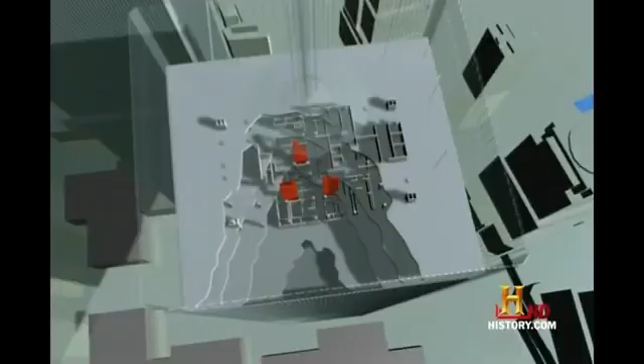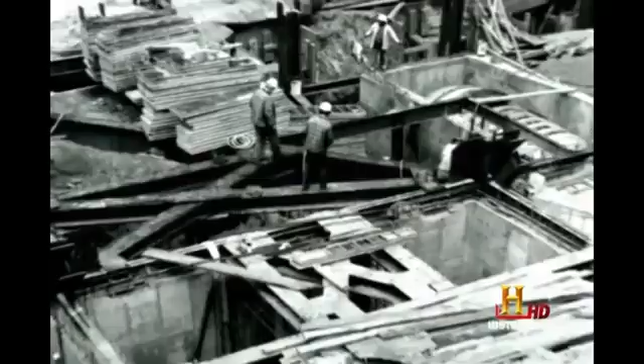The only positive aspect of this building's demise is that it fell 7 hours after the 2 main towers. Everyone had been evacuated, and even though the 47-story building collapsed in on itself in under 10 seconds, no one was killed. World Trade Center 7 was completed in 1987. It had approximately 1.8 million square feet, 47 stories, and was roughly 600 feet tall. Each of the floors was approximately 40,000 square feet, roughly the size of a football field, equal to the size of the floor plate on each of the towers.

The building was a good building. It was soundly designed. It would still be standing if not for 9/11. And it was state-of-the-art at the time, absolutely.

I lost my husband. My son. My uncle. My nephew. September 11th, 2001.

Most people don't know a third tower fell that day. The government says fire brought it down. The collapse of World Trade Center 7 was primarily due to fires. I, along with 1,400 other architects and engineers, have found the government's conclusion to be physically impossible. Impossible. We need the truth about what happened that day. Go to rememberbuilding7.org. Why it fell, why it matters, and what you can do.

Do you believe that the government had anything to do with the attack of 9/11? Do you believe in a conspiracy in terms of the attack of 9/11? No, but I do believe that it is the first time in history that fire has ever melted steel. I do believe that it defies physics for World Trade Center Tower 7, Building 7, which collapsed in on itself. It is impossible for a building to fall the way it fell without explosives being involved.

World Trade Center 7. Towers 1 and 2 got hit by planes. 7, miraculously, the first time in history, steel was melted by fire. It is physically impossible. And who do you think is responsible for that? I have no idea. But to say that we don't know that it imploded, that it was an implosion and a demolition, is beyond ignorant.

Look at the films, get a physics expert here from Yale, from Harvard, pick the school. It defies reason. Let's get one, because that I would do. It is the unthinkable. But imagine if somebody could convince you of that, could prove it to you, Elizabeth.

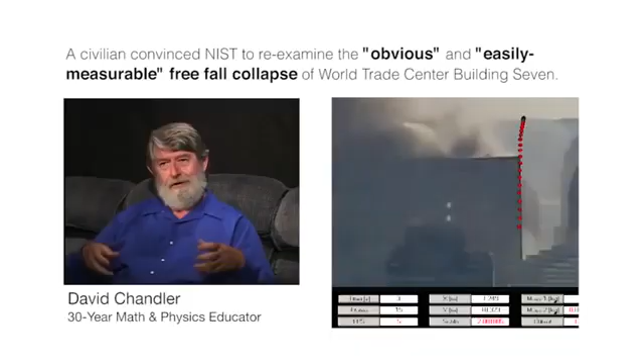Later, the government finally admitted that Building 7 collapsed at the rate of free fall, after trying to deny it. So what's wrong with a building in free fall? What is free fall? It's just like taking your car keys out and dropping them. That's how fast the building came down, for over 100 feet. This is high school physics.

A building cannot do free fall with 40,000 tons of structural steel in its structural system without it being blown up. The only way a building can accelerate as it collapses is by having pre-engineered, precisely timed, and precisely placed explosives. In other words, controlled demolition.

Saw the big hubbub going on around Building 7. Walked around it, I saw a hole. I didn't see a hole bad enough to knock a building down, though. So, yeah, there was definitely fire in the building, but I didn't hear any creaking, or any indication that it was going to come down.

And all of a sudden, the radios exploded, and everybody started screaming, 'Get away, get away, get away from it!' And I was like a deer in the headlights. And I look up, and...

I think I remember pretty clearly the two guys that I knew were on the transit radio. I don't know if those tapes are out there, but I can try and look for them and show you exactly what I'm talking about. But it was that moment, get away.

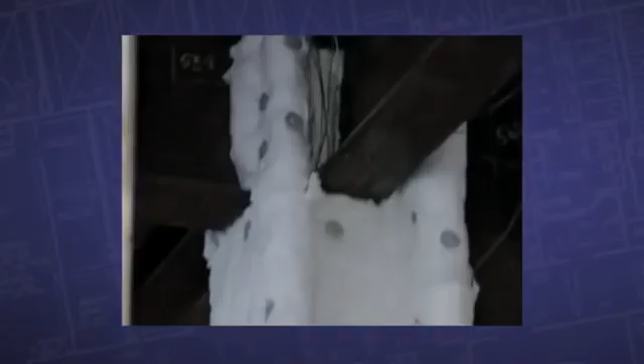In this test done by British Steel in 1995, a large amount of typical office furniture was burned to see what would happen to the heavy steel beams that supported the ceiling. It's not that steel melts in a fire - normal fires are not hot enough to melt steel. Even if you were to use an unusual fuel like kerosene, you cannot achieve temperatures hot enough to melt steel. But what happens is it starts to lose its strength, and as it loses strength, it starts to sag.

This was the largest test of its kind ever conducted. It showed how unprotected steel can be distorted even by a normal office fire. But as is typical in steel buildings, the structural beams only slowly and progressively warped and sagged - there was no chance of a sudden collapse.

In my previous career as a firefighter, normally you'd never be afraid to go into a Type 1 building because they're not combustible - you would just charge at it and put the fire out. Never in my training were we ever taught that these type of buildings could just collapse in on themselves. There's definitely much more going on than just fire.

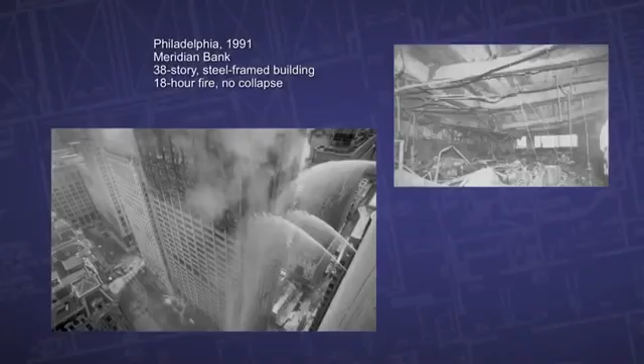The World Trade Center 7 building reminds me of the Meridian Bank building in some ways in Philadelphia. The Meridian Bank building is a 38-story skyscraper that burned for 18 hours in 1991, suffered extensive damage from the fire, but did not collapse.

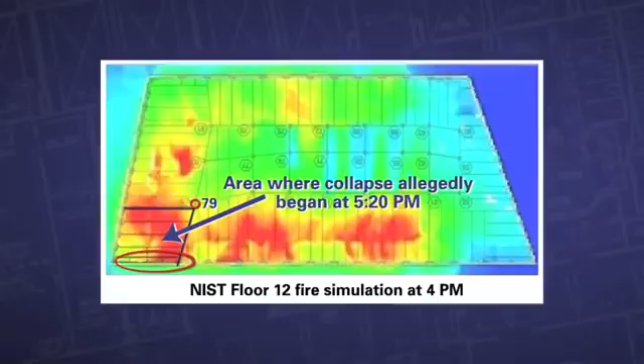NIST tells us this collapse mechanism, starting with thermal expansion, worked its way upward and outward through the building in a matter of seconds - there's not enough time for the building to collapse the way NIST tells us it collapsed. NIST claims the fires were very large, very hot, and long-lasting, when in reality, observation researched by many people shows these fires did not last very long. They were not in the locations where NIST claims they were at given times.

I'm a fellow of the American Institute of Architects. For the 40-plus years that I've been practicing architecture, I've designed a variety of buildings from small houses to high-rise office buildings. Some of the high-rises I've worked on are 1 Shell and 2 Shell here in Houston. I was project manager for a 22-story office building in Akron, Ohio.

Later in the day, when World Trade Center 7 collapsed, they had already shown us pictures of a few fires in that building, and they weren't even raging. How could that cause a building to collapse as if it were imploded? Couldn't happen.

New York City, 2001. No tall building had ever collapsed primarily due to fire. But that's exactly what investigators believe happened to the 47-story World Trade Center Building 7 on September 11th. According to a 3-year comprehensive building and fire safety investigation just completed by the National Institute of Standards and Technology, or NIST, World Trade Center 7 collapsed because of fires. We really have a new kind of progressive collapse that we have discovered here, which is a fire-induced progressive collapse.

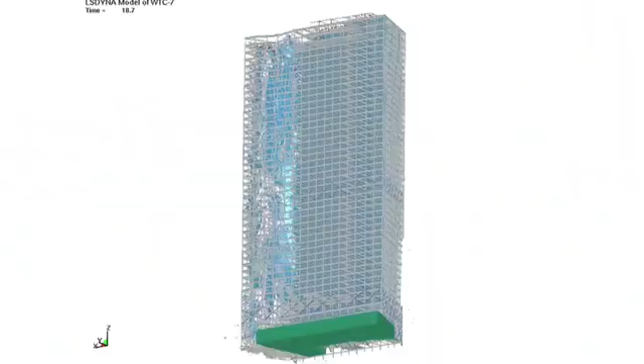And in fact, we have shown for the first time that fire can induce a progressive collapse. NIST used detailed data describing the building and its contents to create the most complex computer simulation of a structure collapse ever made. Falling debris from Tower 1 started fires on 10 floors in Building 7.

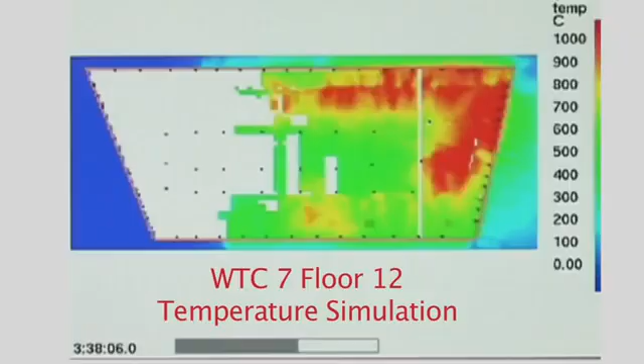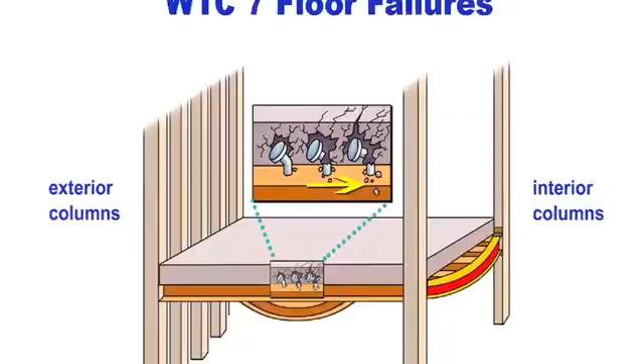A break in the city water main from the collapse of the towers disabled sprinklers in the lower half of WTC 7, allowing fires on those floors to burn for 7 hours. The NIST computer model was validated with evidence from videos, photos, witness accounts, and other data.

It shows that heat from fires expanded long support beams, causing connections and floors to fail. So you look at the floors failing here, and eventually column 79 is going to buckle, it fails, and then the entire vertical progression takes place.

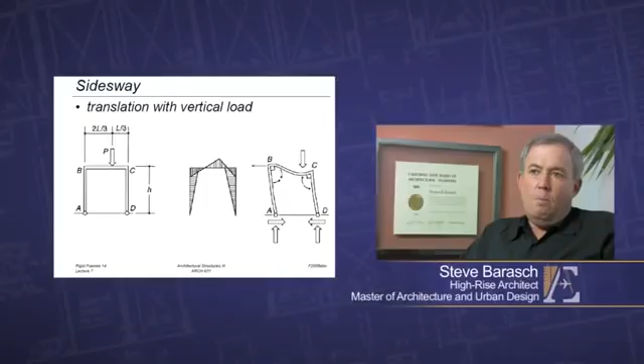If the buildings had come down by fire, we would have seen a more natural progression of collapse, and clearly a more asymmetrical pattern should have been present. The symmetry is the smoking gun. It cannot happen that when you have asymmetric damage, you will get a perfectly symmetrical collapse.

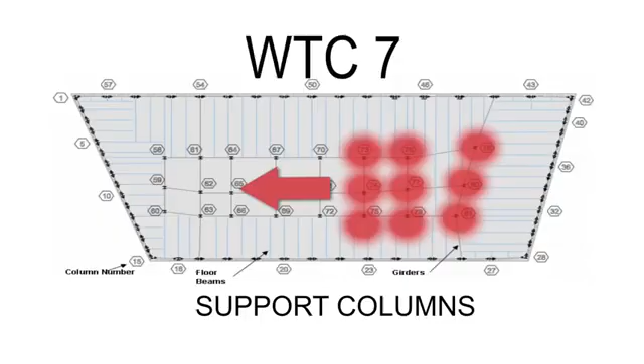The exterior columns on the outside as well as on the inside, at the bottom, would have to be severed almost at the same time. The buckled column caused additional collapsed floors and falling debris that removed support from adjacent interior columns. A chain reaction then caused other interior columns to fail in quick succession. The outside shell of the building fell.

I worked for Controlled Demolition Incorporated, CDI, the top-rated explosives demolition firm in the world. As an explosives loader, my job was to place explosives in the buildings to prepare them for demolition. I was licensed while in New York by the New York Fire Department to handle explosives. And I worked on major projects such as Seattle Kingdome, the Three Rivers Stadium, Philadelphia Naval Hospital, and Keyspan gas holders in New York. What I saw, it was a classic implosion.

The center of the core, the penthouse area, starts to move first, and then the building follows along with it. That's another indicator that this NIST report is very suspect. When it's all finished, the outside walls are piled one on top of the other right in the middle of the building, just like a house of cards if it were coming down.

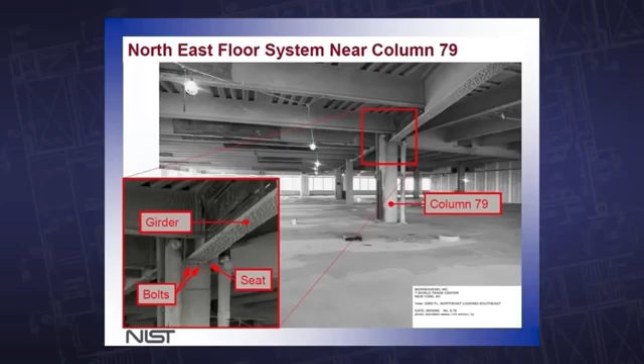As a structural engineer, I don't believe that the failure of one column would normally bring down an entire building in the way we saw World Trade Center 7 come down. According to NIST, the failure occurred at column 79 on level 12. This means basically they're talking about a single columnar collapse or failure that resulted in a total collapse of the building. That just does not make any sense.

The NIST team found no evidence that explosives were involved in the collapse. Our analysis showed that even the smallest explosive charge capable of bringing down the critical column in the building, had it occurred, we would have seen sound levels of 130 to 140 decibels about a half a mile away. That would have been an incredibly loud sound, and that sound was not picked up by any of the videos or witnesses that we have talked to.

In its final report on the destruction of World Trade Center Building 7, NIST, the National Institute of Standards and Technology, went out of its way to avoid investigating the use of explosives. Their sole rationale for not investigating explosive use was the supposed lack of sufficiently loud sounds.

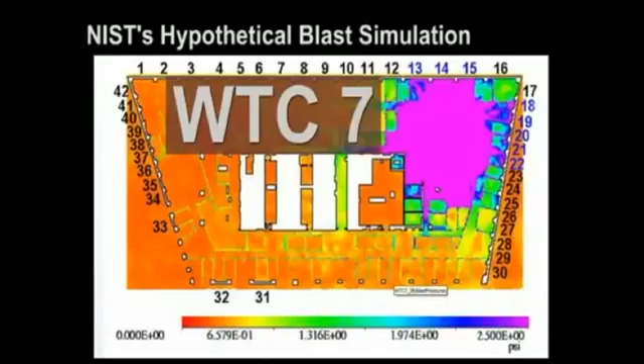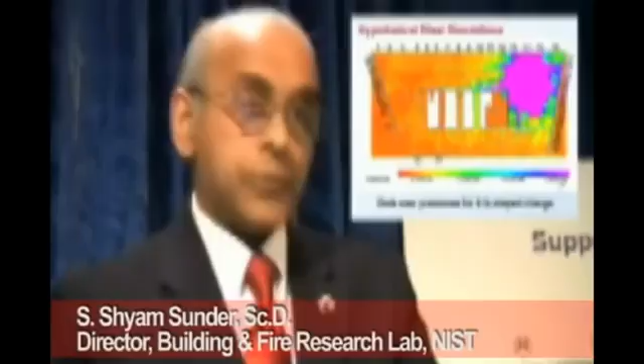NIST computed what they claimed would be the minimum loudness of an explosion that could sever column 79 with a single blast. Then they claimed no observers detected explosions as loud as their predictions. This size blast would have produced an incredibly loud sound that was not recorded on videos of the collapse nor reported by witnesses. On the basis of this artificial threshold of interest, they swept aside all evidence of actual explosions and concluded that no explosives contributed to the destruction of the building.

We did not find any evidence that explosives were used in the collapse of Building 7. Yet there was voluminous evidence of explosions.

Here's one of the guys who can tell you I'm okay, all right? Here, hold on. You want to call your mother or something?

You heard explosions, like boom. We just heard one more explosion. That's about the fourth one we've heard.

A few blocks up West Broadway, looking toward the World Trade Center in the distance, Ashley Banfield was conducting an interview for MSNBC. The mic was set to pick up speech a few inches away, but from the involuntary startle response, 'oh my God,' we know explosions are being heard.

However, listening closely, we discovered that the microphone did indeed pick up the sounds of explosions, but very faintly. Turn up the volume. Listen for a low rumble in the background. You were just told by police that you should move out of your apartment, Fabiana. Yes. You've got Carolina here? Yes. They advised us to leave because we have...

Oh my God. This time the sound has been filtered to emphasize low frequencies. Listen for booms like a bass drum in the distance. In fact, you were just told by police that you should move out of your apartment, Fabiana. You've got Carolina here? Yes. They advised us to leave because we have...

The minimum sound level of interest, as determined by NIST, was based on a blast of RDX, one of the loudest explosives available, large enough to break a major column outright with a single blast. They assumed no efforts at noise abatement, complete transmission of the sound to the outside air, no absorption or blockage of the sound along the path. Who knows if they assumed the use of an efficient cutter charge, or if they simply figured the effect of a bomb planted beside a column. They don't say. Their sole reason for doing this calculation was to create a pretext to sidestep any actual investigation of explosives.

Why would NIST, or anyone else, choose to exclude from its investigation any evidence of any explosions related to the destruction of the building?

At the same time, it should be noted that NIST's report on Building 7 was never published by a peer-reviewed publication. This means their analysis of the collapse cannot be validated from a scientific point of view. Even though this was an unprecedented event in history, we are being asked by NIST to take their word for the soundness of their conclusions.

It's based on sound science, and it is consistent with all the observations we have. But it has never happened before, right? But the physics is consistent, it's sound, it's been analyzed, and we have the results. And we are very comfortable with our findings.

They might have been comfortable, but the scientific community of architects and engineers was not. Science is never secret when it's done right. Science isn't science unless it's published, unless it's openly published and made available for criticism.

Architects and Engineers has asked NIST to at least verify the computer model on which they've based their theory of the collapse. But in this case too, NIST has refused to make their data public. Structural engineers rail against NIST because they refuse to show the visualization. It's a black box. You cannot download any of this data. This means that also for the accuracy of their computer model, we have to take NIST's word for it.

Here is our structural model showing the building collapsing, which matches quite well with the video of the event. This is the video of the event. On the right is one of the two animations released by NIST on the collapse of Building 7. When you observe the footage of how the building failed, and when you look at the animation of the failure, and compare that to what you actually observe in reality, I think they disprove their own theories.

It is impossible for it to fail the way they said. The second animation released by NIST is even more inconsistent with the real event. While the animation shows a pronounced inward bending of the top of the structure, the video footage shows the entire top section of the building maintaining its shape all the way through the visible part of the collapse. This can be verified by different angles.

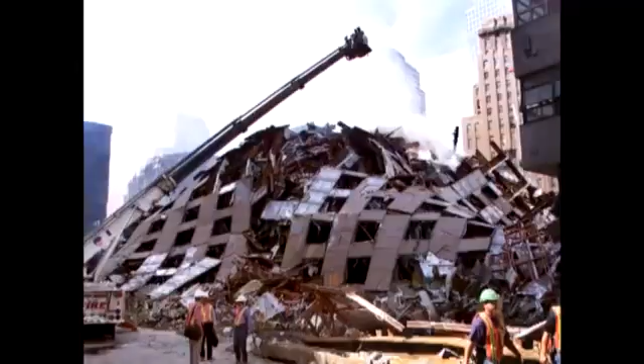If this is what NIST calls matching quite well, one can imagine what the reliability of their entire report can be. In order to justify the first and only collapse in the history of a steel skyscraper due to fire, the debunkers have maintained that Building 7 was weaker than the average steel structure because it had been built over an existing electrical substation. The building was extremely unconventional. It had this giant Con Ed substation with enormous trusses carrying extraordinarily high loads, very vulnerable to fire and other kinds of damage. But NIST itself has refuted this possibility.

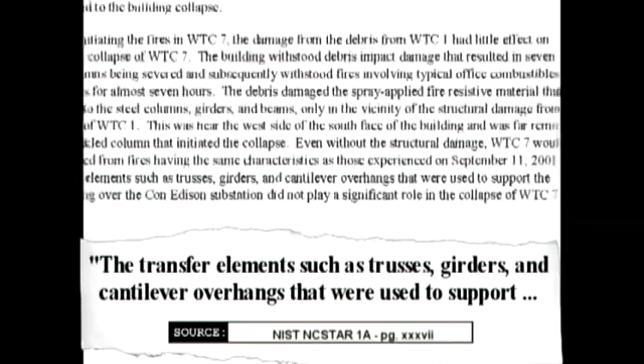From the final report we read: the transfer elements such as trusses, girders, and cantilever overhangs that were used to support the office building over the Con Edison substation did not play a significant role in the collapse of World Trade Center 7. In fact, it was the opposite.

After it was completed, Larry Silverstein had the building reinforced beyond its requirements to accommodate the needs of its main tenant, Salomon Brothers. From a 1989 New York Times article: Salomon Brothers intends to spend nearly 2 years and more than $200 million cutting out floors, adding elevators, reinforcing steel girders, upgrading power supplies, and making other improvements in its million square feet of space. We built in enough redundancy to allow entire portions of floors to be removed without affecting the building's structural integrity, said Larry Silverstein, president of the company. More than 375 tons of steel, requiring 12 miles of welding, will be installed to reinforce floors for Salomon's extra equipment.

If there was one skyscraper in the world that should have never collapsed due to fire, it was Building 7.

In other news this week, the finding that allowed the National Institute of Standards and Technology to withhold data from its World Trade Center 7 collapse simulation has finally been released via whistleblowing site cryptome.org. The finding was made on July 9, 2009, and reads in part: 'The disclosure of the information in connection with NIST's investigation of the technical causes of the collapse of the World Trade Center towers and World Trade Center Building 7 on September 11, 2001 might jeopardize public safety. Therefore, NIST shall not release the information.' Although the finding was made last year, the actual finding itself was not available to those who had requested the information, leading many to suspect it would contain details of exactly how or why the data from NIST's WTC-7 collapse simulation would jeopardize public safety, but no such explanation is to be found. Analysts note the finding is especially odd given that NIST itself has claimed the collapse of WTC-7 was an extraordinary event, unprecedented in history, and that they arrived at that conclusion using the computer model whose input and result data they have now classified in the name of public safety.

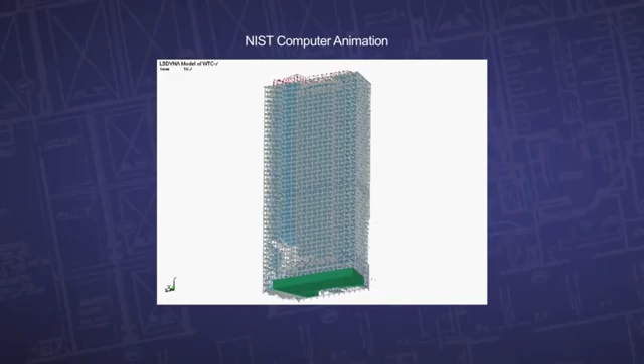Many are wondering whether NIST's reluctance to release their data is due to the questionable nature of the science underlying a simulation that many have pointed out is little more than a visual recreation of the initiation of a building collapse, which in itself explains nothing and does not even show the entire progressive collapse of the 47-story building.

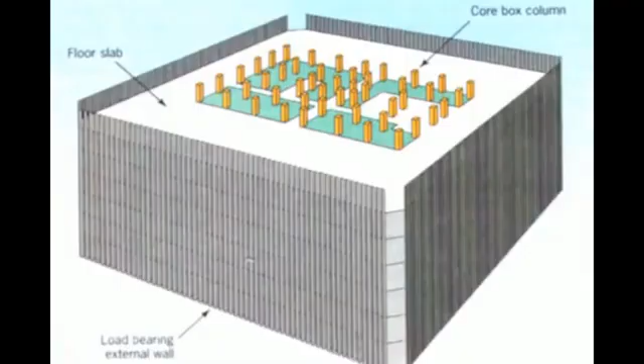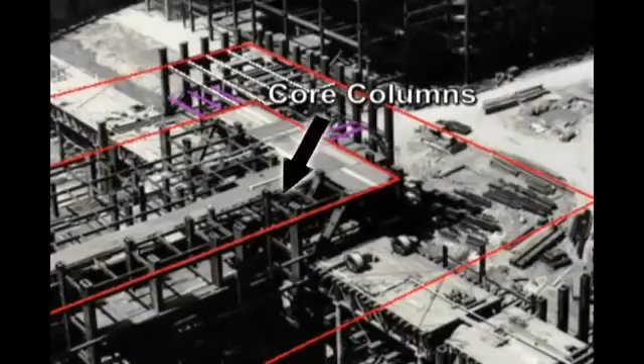The cores themselves, if you've seen diagrams of the building, there's a large central rectangle in each of the towers that contained 47 columns. These columns were the primary structural support of the building.

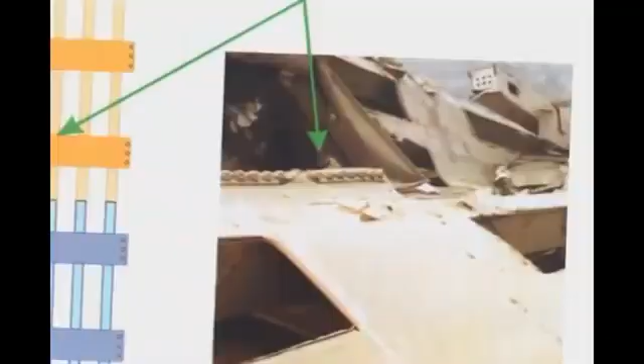They were given the role of supporting the whole gravitational load of the building. Since they were so strong, it would have been reasonable to think they would have withstood, at least to some extent, the collapse. But in fact, after the buildings collapsed, there were basically only little stubs of these things standing up a floor or two above ground level.

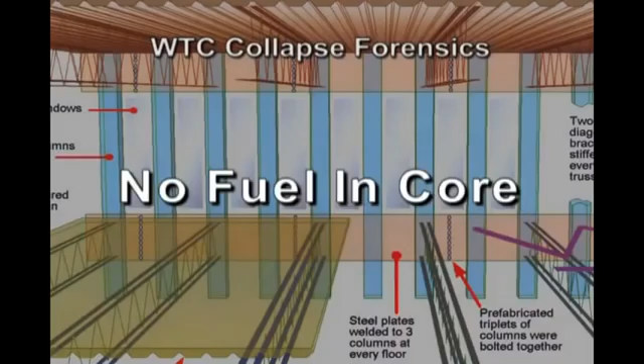The cores did not have much in them that would burn. They were dedicated to things like elevator shafts, utility shafts, stairways. So you have drywall material, a little bit of carpeting, but not really any inflammable material in the core itself. The core was specifically designed so it could not function as a chimney.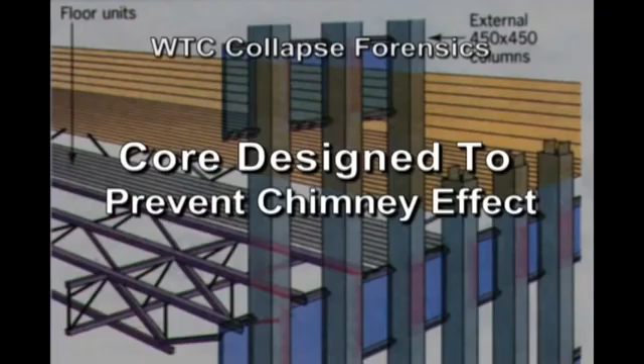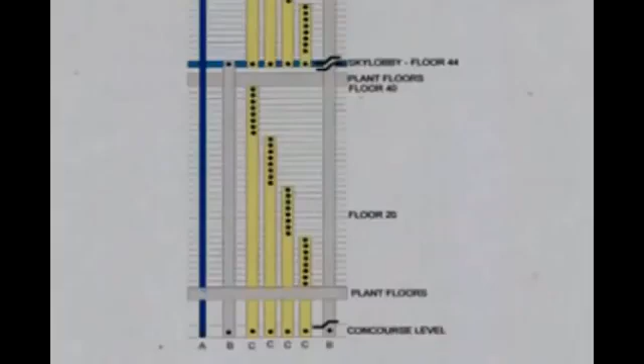They did not want, in case of a fire, for the fire to travel through the elevators, or for air to come in through the elevators. So they were designed with what this architect, Aaron Swirski I believe, referred to as a hermetically sealed system. There were fire shutters designed to close off the core in an event like this, and those, as far as we know, functioned properly, meaning there was a very limited amount of oxygen available.

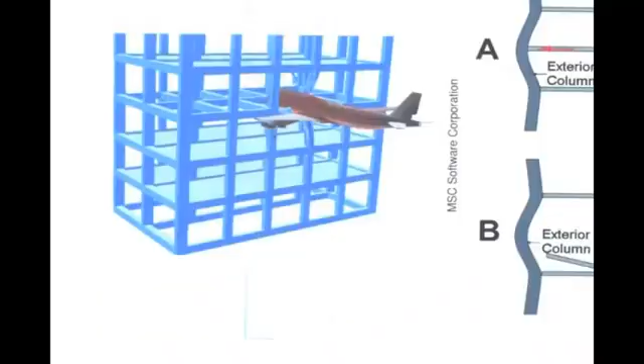As far as the issue of what failed and how, some of the initial suggestions showed up in the NOVA documentary, which is a good example of what I like to call proof by computer animation. Thomas Eagar, who was a material scientist but not a structural engineer, became a spokesman for these documentaries, and indicated that the floors had somehow failed, that the trusses supporting the floors had failed. This was the theory put forward in the initial FEMA report.

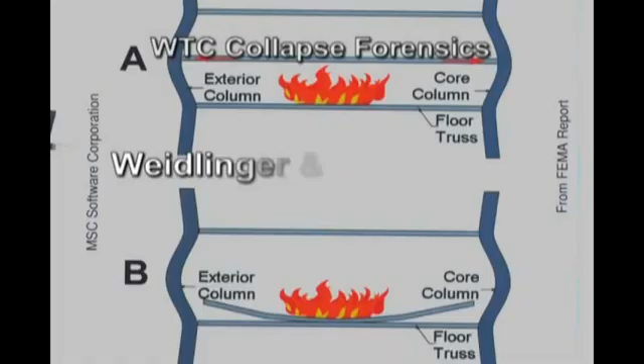Subsequently, there have been complete contradictions of that. Jim Hoffman has done quite a bit of research, available on the web, concerning the problems with this idea that the floors would have simply fallen. There was a study done by Weidlinger Associates; the chief engineer there was Mathys Levy, a very well-known authority on building collapses. He specifically disavowed the idea of pancaking or collapsing of the floors.

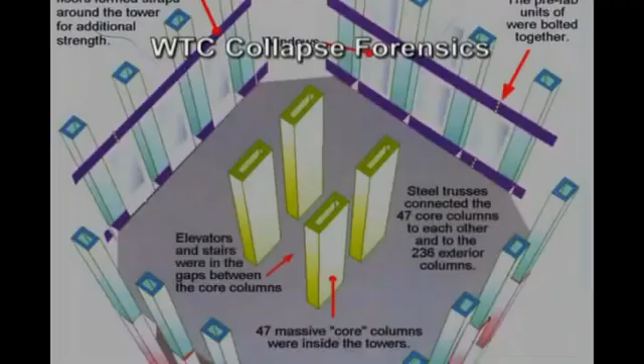The most recent official report we have on this, from the National Institute of Standards and Technology, NIST, rejected the idea that floor collapse was part of it. As a result, we have basically no sequential model at this point. What NIST has suggested is that there was some kind of simultaneous collapse of the cores, but they have not attempted to give any modeling as to whether those cores could have in fact been destroyed by the fires in the way that they claim.

The building was designed to have a fully loaded 707 crash into it. That was the largest plane at the time. I believe the building probably could sustain multiple impacts of jetliners, because this structure is like the mosquito netting on your screen door, this intense grid, and the jet plane is just a pencil puncturing that screen netting. It really does nothing to the screen netting.

I walked into the office and the first words I heard were, 'A plane's just run into the World Trade Center.' My initial thought was, well, that's okay, it's built to withstand a 707. It did not seem possible that these towers, designed to withstand the impact of a 707, could possibly collapse in such a short order of time from the time they were hit.

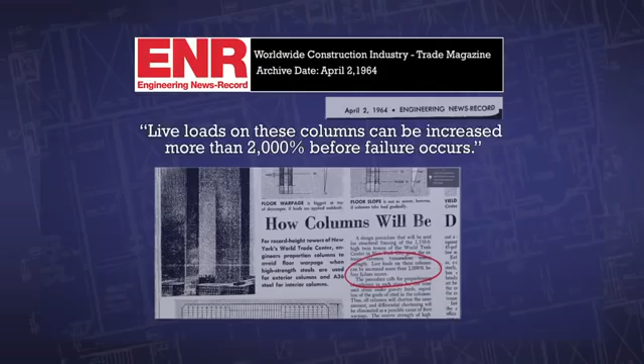They were designed to withstand hurricane force winds of up to 140 miles an hour. These buildings are built to handle several times the load above them. Those perimeter columns could handle 5 times the load above them, and the core columns could handle 3 times the load above them.

I remember walking up to a window, and a young man turned to me with tears coming down his face, and he said, 'Will they fall down?' And I said, 'No. Never has a steel structure building in the history of steel structured buildings ever fallen down for the reasons of fire.'

The majority of the jet fuel was burnt up instantly in the big fireball, and it was gone. The fires that were left were office furnishings and carpet and things like that. A lot of things in these kinds of buildings have to be fire resistant by nature—it's required by code. So there really isn't a whole lot of fuel in there to begin with.

The media portrayed these fires as being extremely hot, but the fires were not that hot in World Trade Center 1 and 2. If you look at NIST's own data, you could see this.

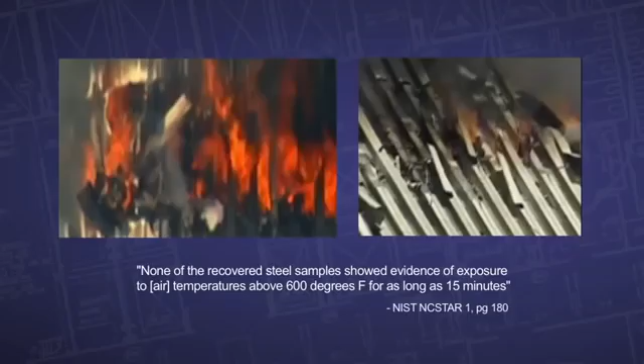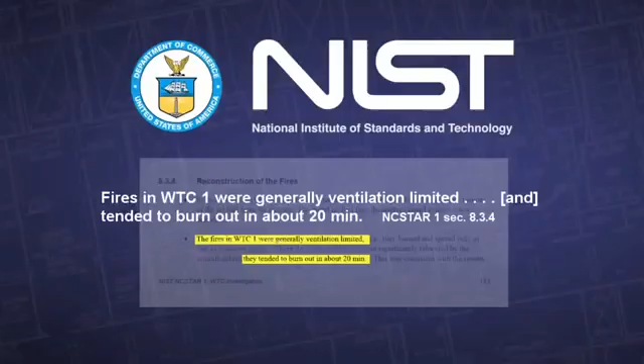Using our own powers of observation, you could tell by seeing these fires and the black smoke coming out of the windows that the fires were oxygen starved and incomplete combustion, which meant it was a low temperature fire.

I looked up in a manual the burning temperature of jet fuel and found that under the conditions that existed at the World Trade Center on 9/11, the jet fuel had to have been burning at about 750 degrees Fahrenheit. I also noticed that the official explanation was that the heat from the fire supposedly softened the steel and thereby brought the buildings down.

If you have a flame at 750 degrees, you can hold that flame under a steel beam forever and never reach a high enough temperature to bend steel, let alone melt it. So immediately I knew at that point that the official explanation was dead wrong.

First of all, let's go back to your basic premise that there was a pool of molten steel. I know of absolutely nobody, and no eyewitness who said so, nobody who's produced it.

You'd get down below and you'd see molten steel running down the channel rails, like you're in a foundry. Yeah, like lava from a volcano. Actually melted beams where it was molten steel that was being dug out. Underground, it was still so hot that molten metal dripped down the sides of a wall. It's this fused element of steel, molten steel and concrete and all of these things all fused by the heat into one single element. And they pulled off a big block of concrete, and there was like a little river of steel flowing.

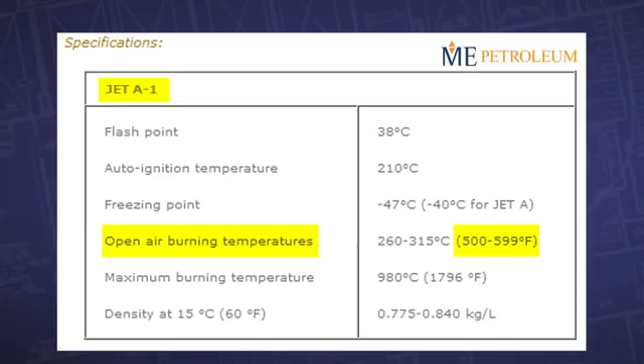There were reports of molten steel having been seen in the rubble pile of all three buildings, and I knew that jet fuel, which is essentially kerosene, is not capable of melting steel nor iron. Kerosene or jet fuel burns at less than 1800 degrees Fahrenheit, and molten steel needs at least 2700 degrees Fahrenheit in order to melt. In an office fire, you cannot generate enough heat to melt steel.

And yet we have evidence of molten iron in the microspheres, in the rubble pile, and the metal pouring out of the side of the tower.

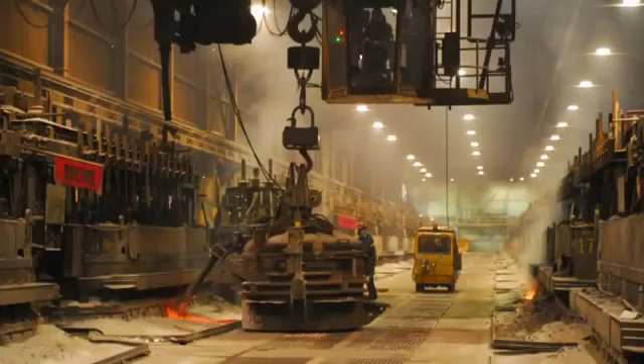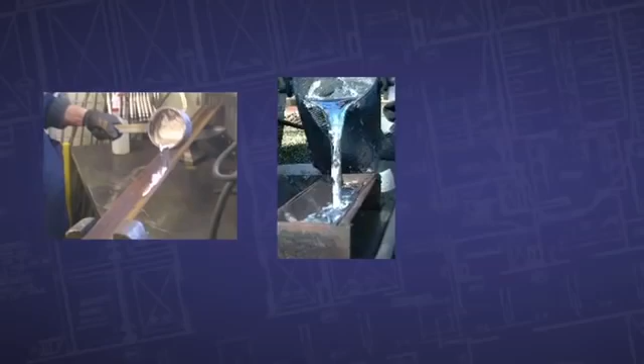I worked as in the project engineering department of the casting plant of Alcan, the aluminum company of Canada, one of the largest aluminum smelters on the planet at the time. In that smelter we turned aluminum oxide into aluminum, molten aluminum. Molten aluminum is silver, it's not yellow. It looks like mercury. The yellow molten metal that I saw pouring out of the South Tower is indicative of molten iron.

Overflights had detected with infrared camera 1400 degree Fahrenheit hotspots on the surface of ground zero, and that being there for a week indicates that there was something very hot going on below the surface.

This is how it's been since day one. Oh, it's unbelievable, and this is almost 6 weeks later. As we get closer to the center of this, it gets hotter and hotter. It's probably 1500 degrees. We've had some small windows into what we thought was the core at some point, and it looked like an oven. It was just roaring inside, and it had a bright reddish orange color.

See that stuff he's pulling out? What was that, Chief? We're gonna hold off on the water. See the stuff he's pulling out? Yeah, it's red hot. If we hit it with too much steam, you won't be able to see what he's doing.

There were fires of 2,000 degrees Fahrenheit below the ground. You see how this debris is still smoking? That's from the fires that are still burning. 8 weeks later, we still got fires burning.

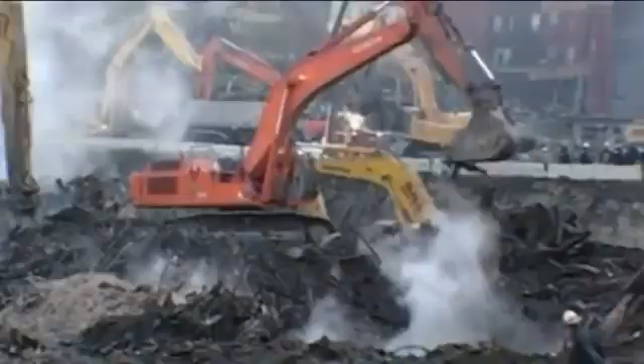Every now and then, one of the pieces of equipment will dig in, they'll open up a small area, the oxygen will rush in, and you'll get this plume of brown, black smoke coming up. That's because that fire just got more oxygen. So these things are burning. At one point, I think they were about 2,800 degrees.

One of the most significant things to my thinking that indicates this could not have been the sort of collapse we are told it was is the presence of the dust clouds. As you've seen in the pictures, there were very large clouds of very thick dust that enveloped the area, crossed the river, and made it almost all the way to New Jersey.

This type of flow is something we are familiar with in physics. It occurs in only two situations we know of naturally. One is volcanic eruptions, where a large amount of material is suddenly exploded into the air and forms small particles. The other is turbidity currents, which occur along the edges of continental shelves where mud or sediment slumps and becomes suspended in water. The common thread is that you have large amounts of dense material suspended very quickly in a fluid, creating another denser fluid, which is in effect the dust cloud. That fluid can achieve considerable velocities.

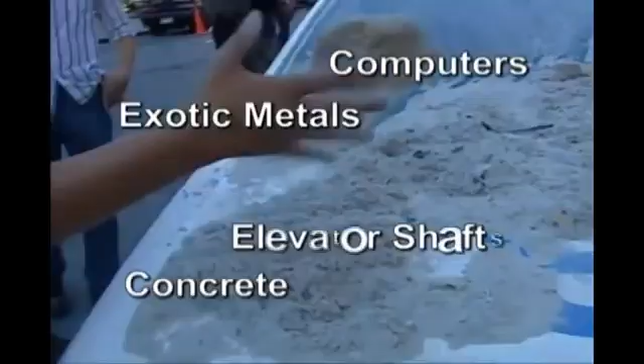From quite a few people on the scene, we've been told that the powder represented most of the concrete, that the amount of intact macroscopic chunks of concrete on the scene were negligible, that basically everything was reduced to powder. We also know that other things besides concrete were reduced to powder. Contents of computers, exotic metals from computer chips, these sorts of things were also identified in the dust and in very small particles, generally on the order of less than 100 microns in diameter. So we have a real issue of mechanism as far as what in the process of this collapse could cause so many things to be pulverized so finely.

You have two 110-story office buildings. You don't find a desk. You don't find a chair. You don't find a telephone, a computer. The biggest piece of a telephone I found was half of the keypad, and it was about this big. The building collapsed to dust.

The spread of debris in a large radius around each tower—what we see is an outward explosion of material beyond the perimeters of each footprint. This is not expected, and it's not congruent with the reports of our government. Large multi-ton beams were hurled hundreds of yards laterally. Gravity works vertically, not laterally.

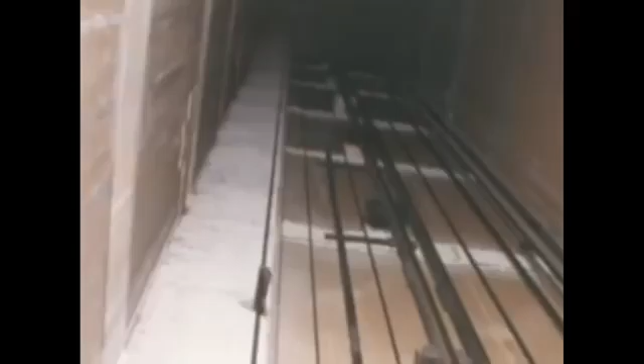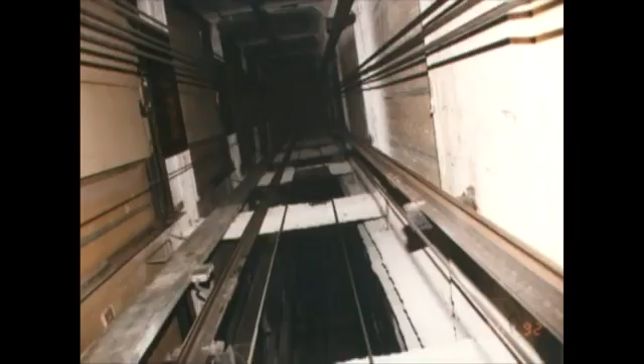There are, however, different facts to be considered. The first is that in the months previous to 9/11, a major renovation of the elevator system in both towers was undertaken. From the March 2001 issue of Elevator World: 'Ace Elevator undertook what was perhaps one of the largest, most sophisticated elevator modernization programs in the industry's history at New York City's prestigious World Trade Center.' No one is suggesting that this company had anything to do with the possible planting of explosives, but such an extensive renovation process would have certainly provided the cover for a special team to access the internal structure of the buildings at any given time.

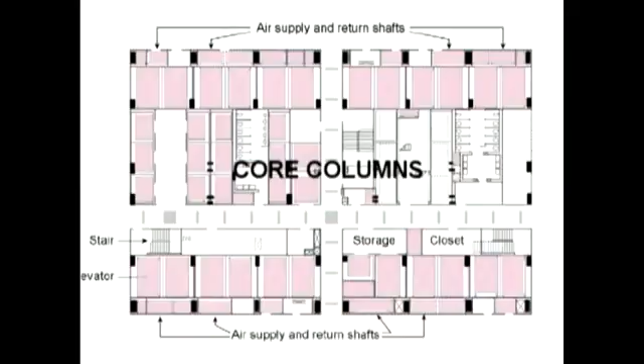As explained by Richard Humenn, Chief Electrical Engineer for the Twin Towers, the elevator shafts gave direct access to the core columns. I'm very familiar with the interior structure that surrounded the elevator shafts, and of course their access to the elevator shafts gave them total access to the surrounding core columns, the interior of the core columns.

Secondly, the movement of heavy equipment on floors that were supposedly empty was noticed in the weeks leading up to 9/11. Scott Forbes worked for a financial institution on the 97th floor of the South Tower. It must have been at least 4 to 6 weeks before 9/11. It was like rebuilding work going on upstairs. The tenants, the people from Aon who had been there, were moved somewhere else. The offices were just vacant, and there was a lot of heavy machinery building work going on.

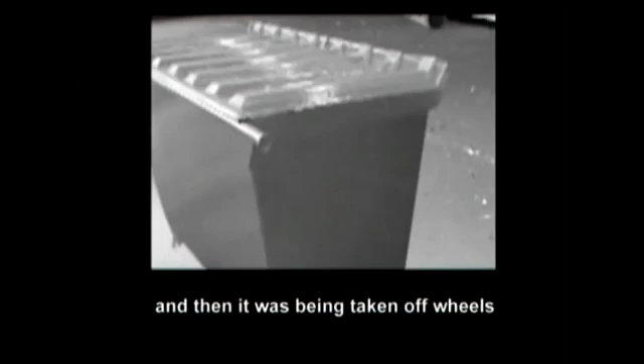It was almost like pneumatic drills and lots of hammering, so much so that the floors were shaking. That's how noticeable it was. It was almost as if something heavy was being moved and then taken off wheels, and it went boom. Our floor underneath literally shook. You could feel the weight above you.

William Rodriguez, an employee at the Twin Towers for more than 20 years, recalls a similar experience. As I stood there on the 33rd floor, I heard very strange noises on the 34th floor. I heard very heavy equipment being moved around, and it sounded like dumpsters with metal wheels being moved around, and I got scared because I knew it was an empty floor. Nobody was supposed to be there.

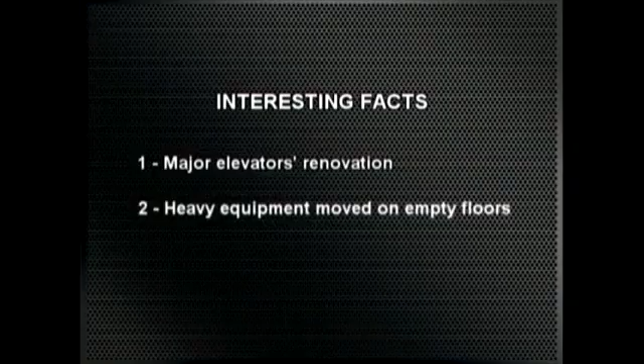Not even the elevators stopped on the 34th floor - you needed a special access key to open the door there. After the 1993 attack, bomb-sniffing dogs had been adopted in the Twin Towers' security system, but on Thursday, September 6th, the dogs were abruptly removed, according to a security guard, with no apparent reason. And lastly, there was an unprecedented power down in the South Tower the very weekend before 9/11.

For the first time in 30 years, all the security systems in the building became useless at the same time. People could come and go as they pleased, even in protected areas, without being seen or recorded by surveillance cameras. Because of the power down, there was a complete breakdown of security that weekend - we had guided tours coming into secured areas by mistake, and nobody picking it up because there were no intrusion alarms or anything else.

Scott Forbes was also present during the power down. There was a power down in the South Tower on the weekend of the 8th and 9th of September, and it wouldn't have just affected camera security - it would have affected all the secure systems on doors, either key locks or security badges and so on. Those locks weren't working because they're all powered by electricity, so there was no power, there was no backup system, therefore they were all open.

What was the excuse that the Port Authority gave you, Scott, for this 36-hour period of the power being down in the South Tower? The explanation was that there was a recabling exercise to increase the bandwidth of networks available in the towers. The debunkers are right - it would have been very difficult to bring in explosives without being noticed. But with the proper cover story, it could have been done under everyone's eyes, in full daylight, without anybody even questioning what was going on.

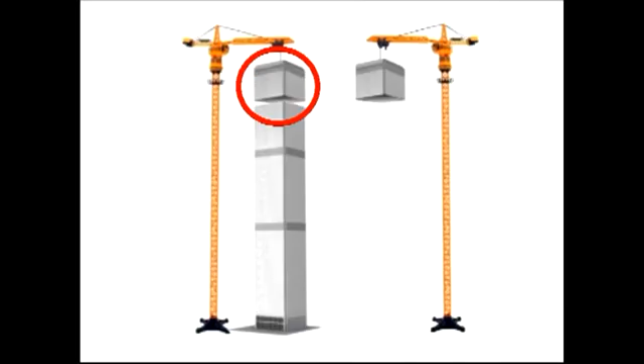Assuming that the top section on the left contains enough potential energy to destroy the rest of the tower, and assuming we dropped both upper sections at the same time, which one would hit the ground first? It would be the second, of course.

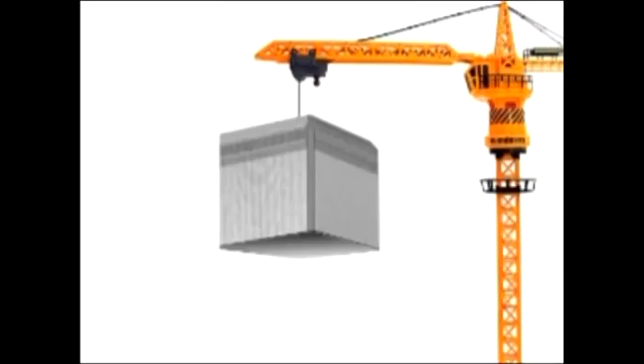As it finds no obstacles in its path, the section on the right would quickly accelerate to free fall speed and maintain it all the way to the ground. The section on the left instead needs to use some of its energy to destroy the structure below, so it could never achieve free fall speed.

In the case of the Twin Towers, however, both upper sections fell with an acceleration close to free fall speed, as if their path had been practically free from obstacles. It took each tower between 10 and 12 seconds to collapse to the ground, while an absolute free fall time would have been 9.2 seconds.

In other words, both upper sections of the towers found enough energy to destroy 80,000 tons of healthy structure below, while accelerating to near free fall speed. This is, as we have said, absolutely impossible by gravity alone. The law of momentum conservation won't allow it.

A building cannot do free fall with a huge steel structural system in place to support it. The Twin Towers could not have come straight down through the resistance of 80,000 tons of structural steel at the speed of practically free fall. That just would not happen.

If in fact it actually hit and made an impact, it was effectively crushing anything, pushing hard on this core structure below it, the core structure is going to push back equally hard. And that's what's going to cause the top section of the building to slow down. As energy is drained away from the system to deform those members, it would slow down the descending mass and cause a descent at less than free fall speed.